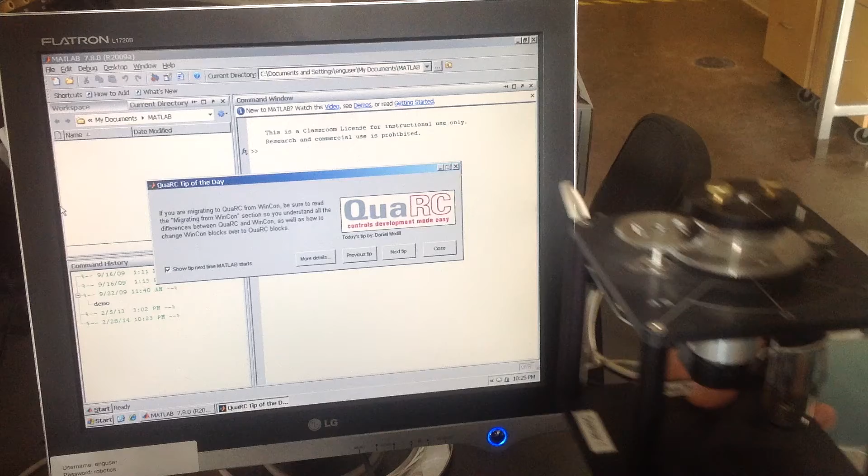Okay, hi everybody. Let me explain the setup for our course module here, course project.

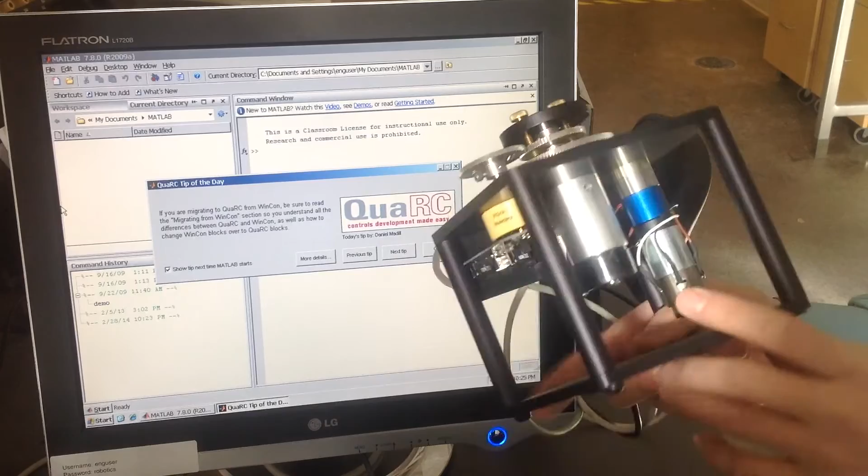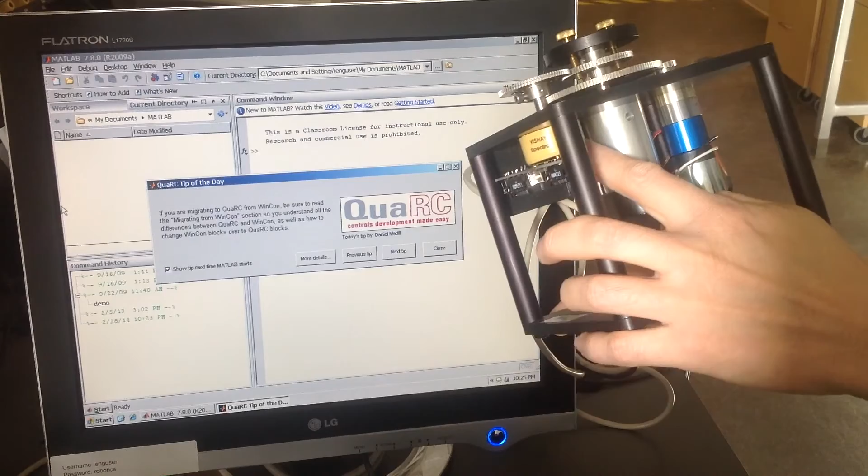This is the Quanser SRV02. This is the base module. It has a DC motor, and there's a tachometer attached to this DC motor. There's a digital encoder here, and an analog potentiometer here. We also have some gearing here for transmitting the load.

This is basically for hooking up external add-on modules. You can have a flexible link, flexible joint, double pendulum or single pendulum, inverted pendulum. But we're going to basically focus on the base module right here.

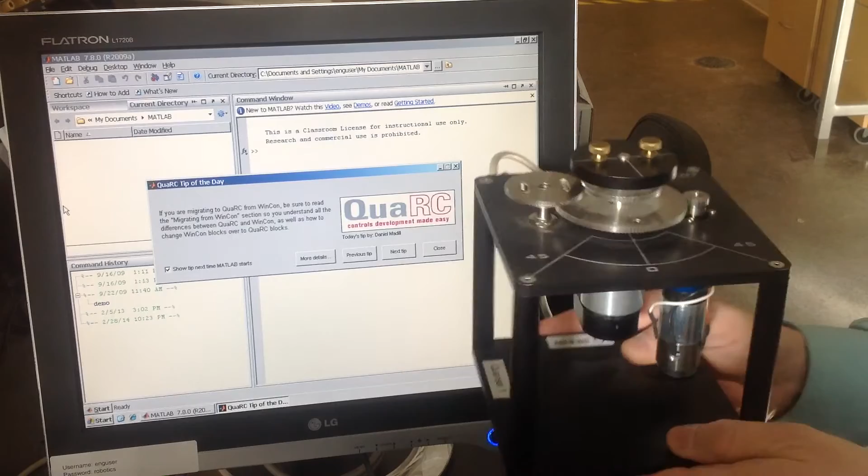There's some wirings from the sensor and also from the amplifier over there, to this module right here.

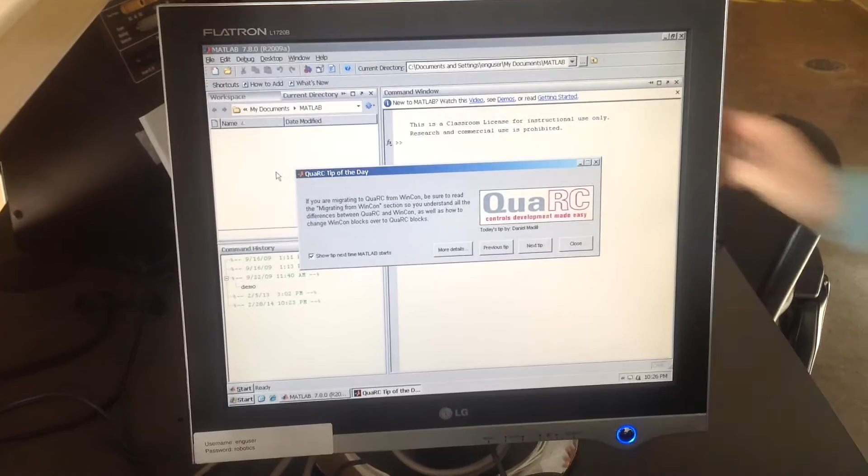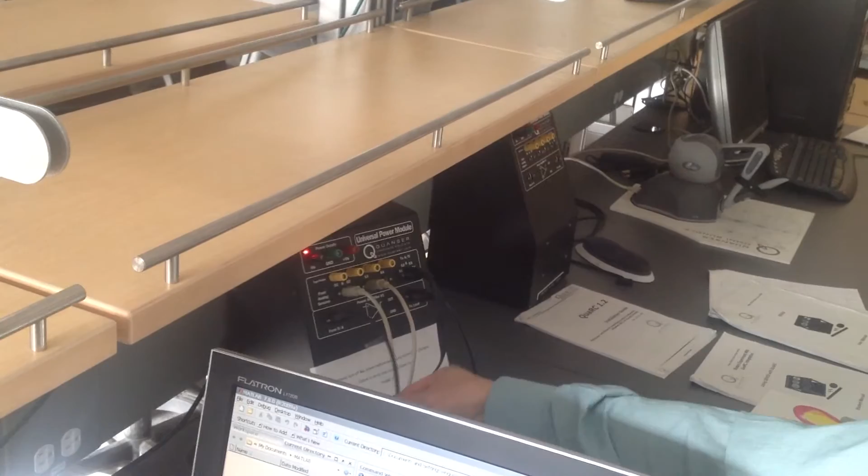The black module over here, that's the power amplifier. For example, the analog signal from the D and A are given to the power amplifier and then fed to this base module here to drive the motor.

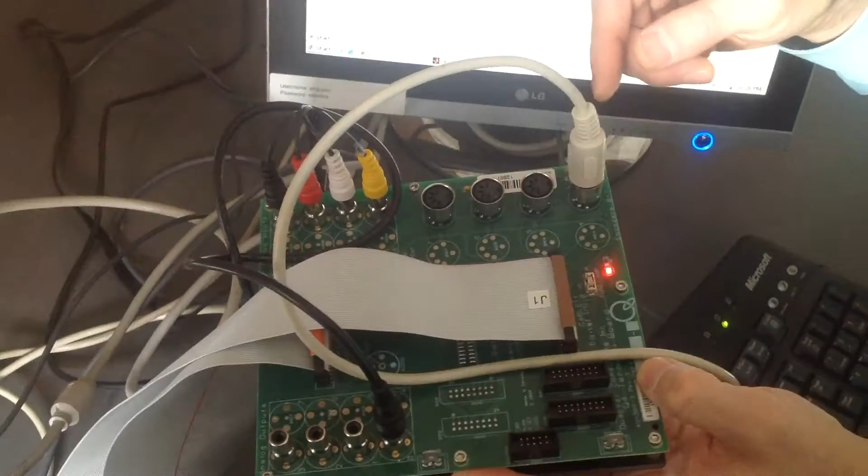Now this module right here is an interfacing board. It interfaces between the hardware here with the QuaRC board inside the computer. The QuaRC board inside the computer will do the compiling and do the execution of the code. Yeah, so that's roughly the system setup here.

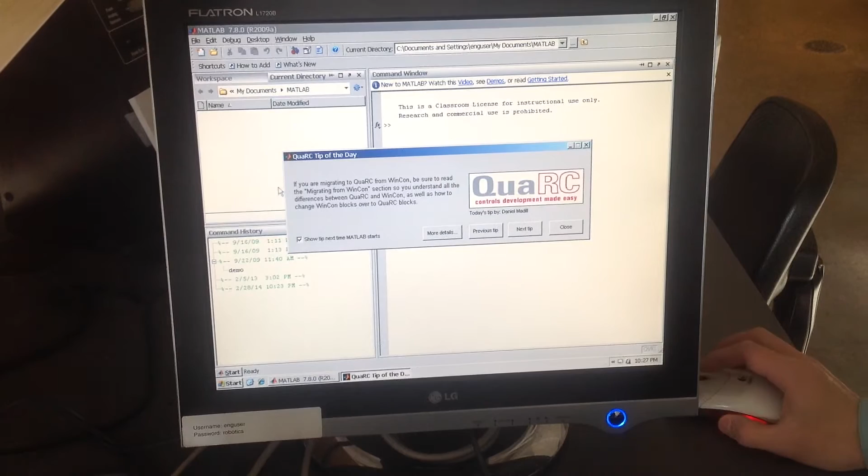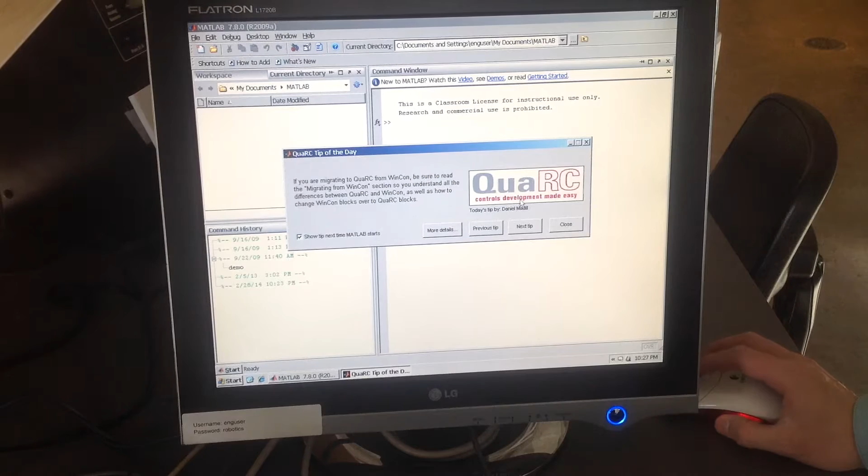Now, when you run up MATLAB, you will see that this QuaRC, which is the library or software for the real-time control system, will start up automatically. It will also add up to the Simulink library, which you can make use of. So once you start it up, you can run Simulink.

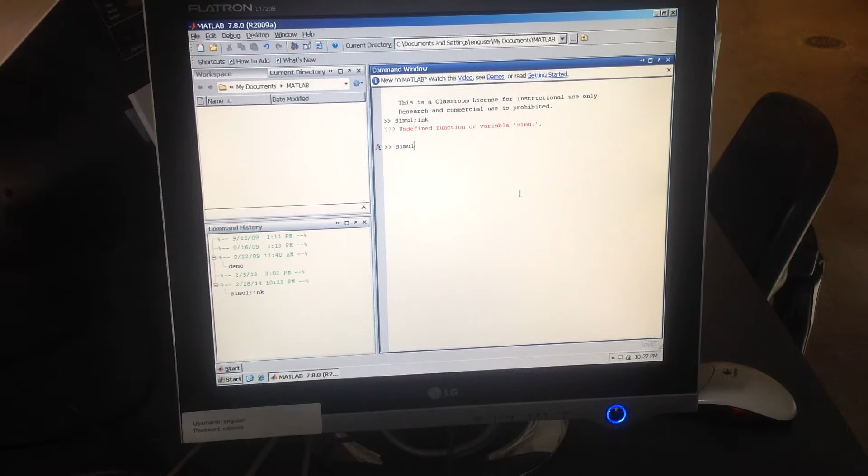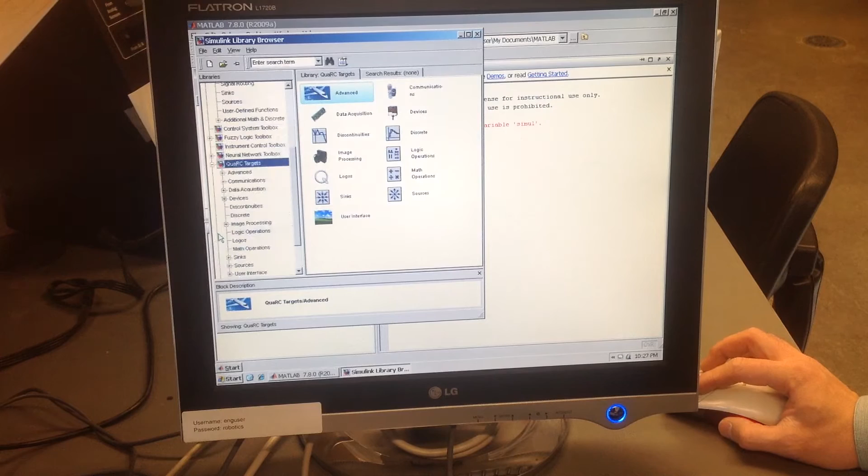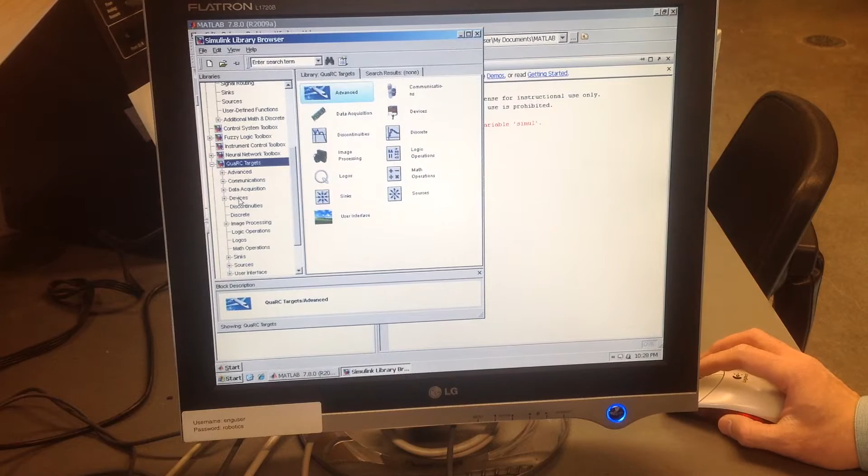As you can see, under Simulink there is a QuaRC target. All the relevant libraries related to the hardware we're talking about are underneath this QuaRC target here, right? So you can just drag some of the blocks and make use of them in case.

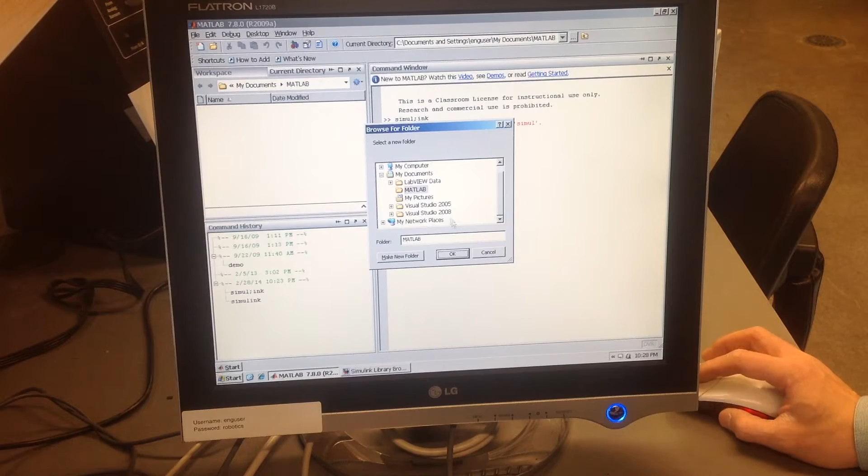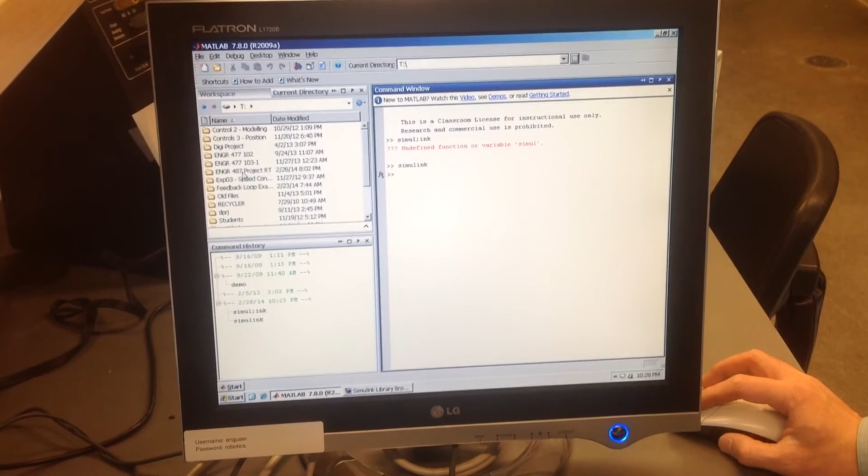Now, when you start, make sure you go to your working directory, to the T drive, the thaw space here. Under the T drive, we have a folder called ENGR487, and this is the folder I want you to work under. You can create a folder under here for your group.

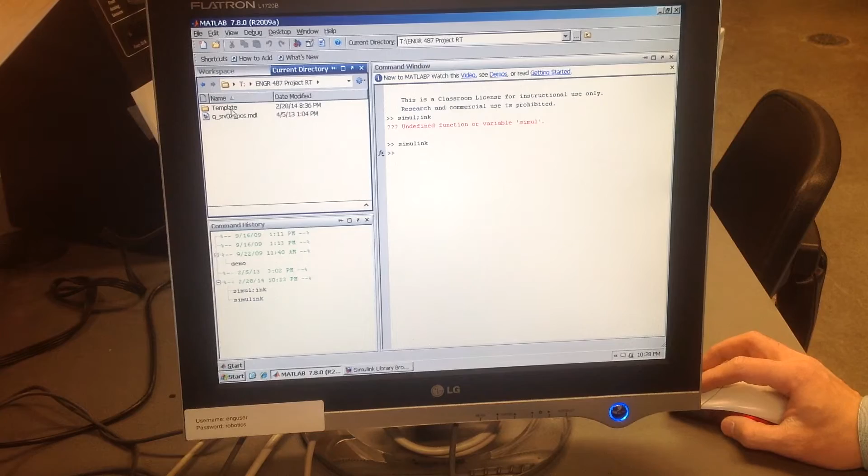And there's the template. So this is the template. Basically, you can make use of the template to build up your controller. So I'll basically show you what the template is.

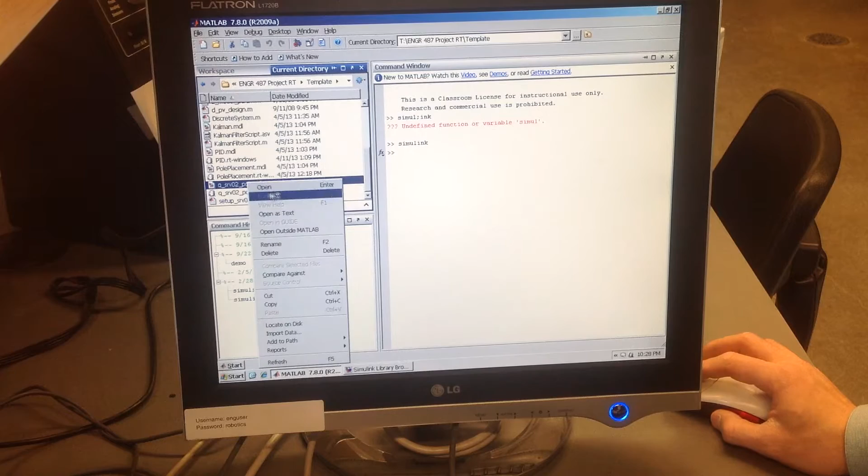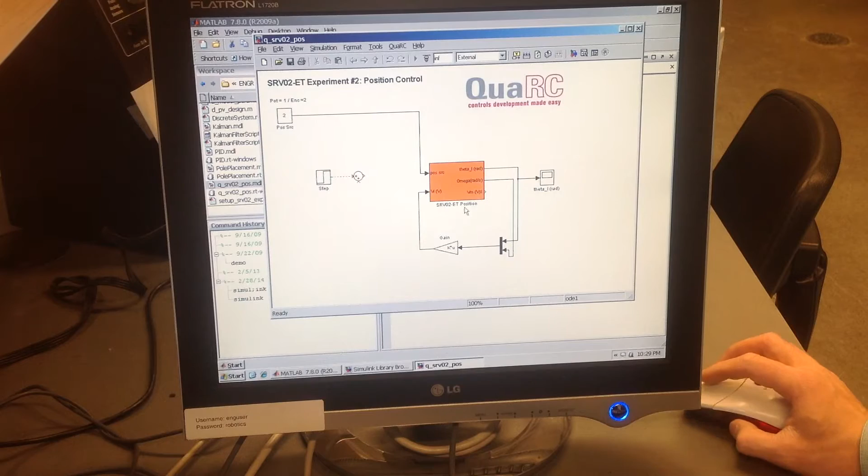So here's the MDL, the Simulink file. Okay, right now it has something here, so I'll keep it here. In the future, in the template, all you have here is just this orange block, okay? This orange block represents the model of the system, which is this guy.

That model, you can mathematically model in one of the short descriptions uploaded to Blackboard. I have a second order model given already. The model is second order between the position and input.

So this guy here represents basically the hardware, right? As you can see, it's a masked block. There's a position, there's a VI, basically that's the voltage input to the module, and the block outputs position, velocity, and the actual voltage given to the system. So for this here, the position basically enables a selection.

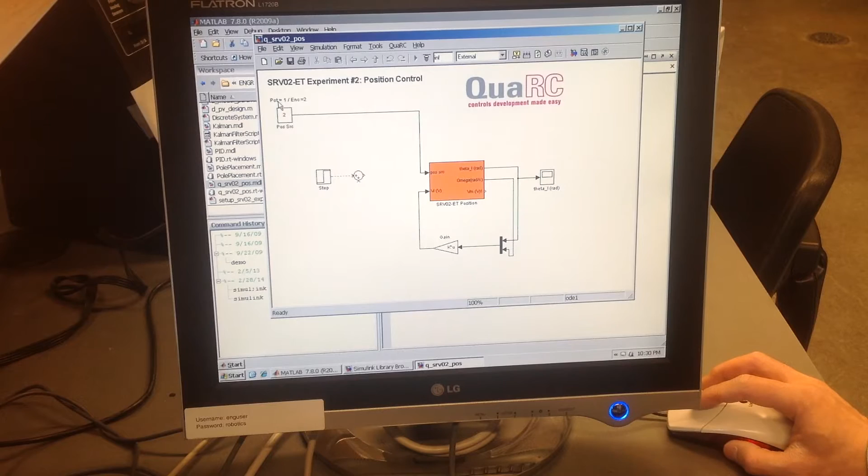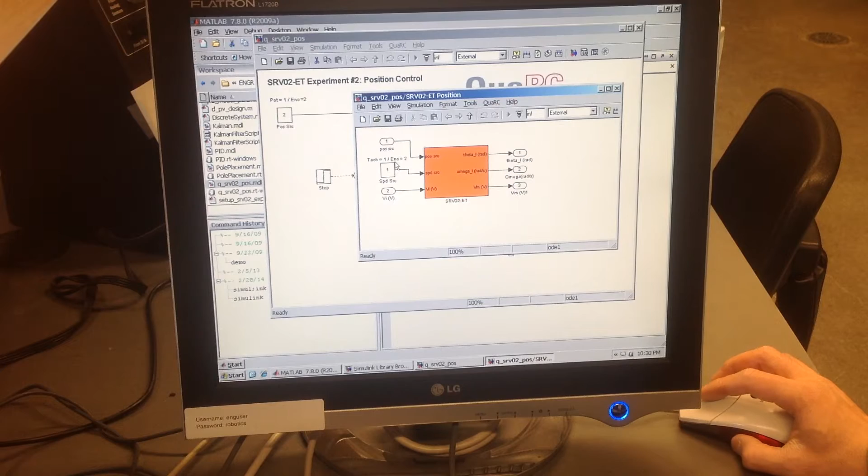The numbers here tell you what position signal you are going to use - are you going to use the potentiometer as a sensor, or the encoder as a sensor? If you open it up here, there's another one here for the speed source. The speed can be from the tachometer, or it can also be through the derivative of the encoder. So that's basically what the number 1 or 2 will represent here.

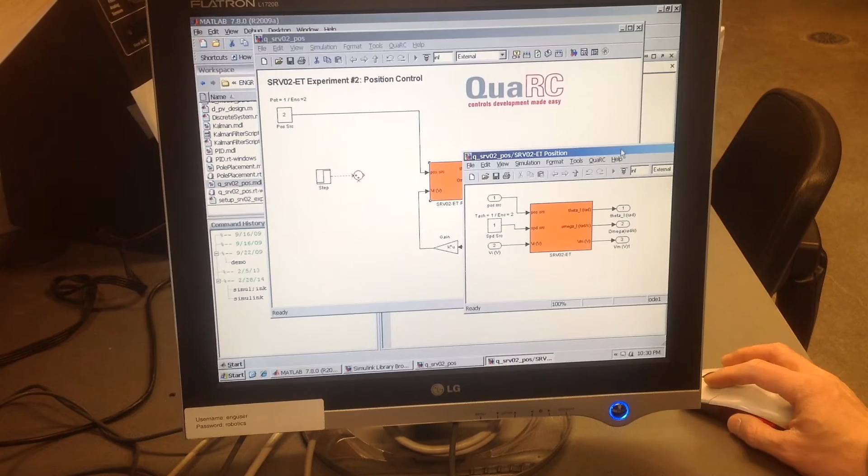The VI here is basically the control signal into the plant, and that control signal is going to be generated from your controller. So underneath this block, that's basically how the signals are being taken in and how the signal is going to be sent out. For example, if you look at this one here, can we zoom in?

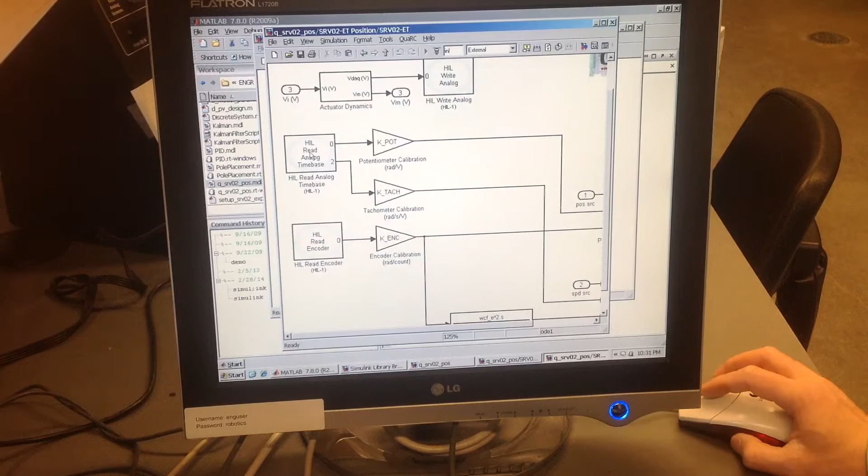So this one here is an HIL read analog time base. This is basically the block I was talking about under Simulink. So if you go to QuaRC data acquisition, generic, time-based - those are blocks coming out of here.

Okay, so what this block does is it reads in the analog signal. There are two analog signals: one is the position, one is the tachometer. Channel 0 gives you potentiometer, channel 2 gives you the tachometer. If you double click here, the board name has to be HIL-1, and this is the channel selection here.

Similarly, there's a HIL read encoder. There's only one encoder, so that's just channel 0. Those are basically some calibration gains that are here to calibrate the reading, to give you the correct value.

And by the way, these parameters need to be initialized. So before you run everything, you need to run this M file here. It's called setup file to initialize all the parameters.

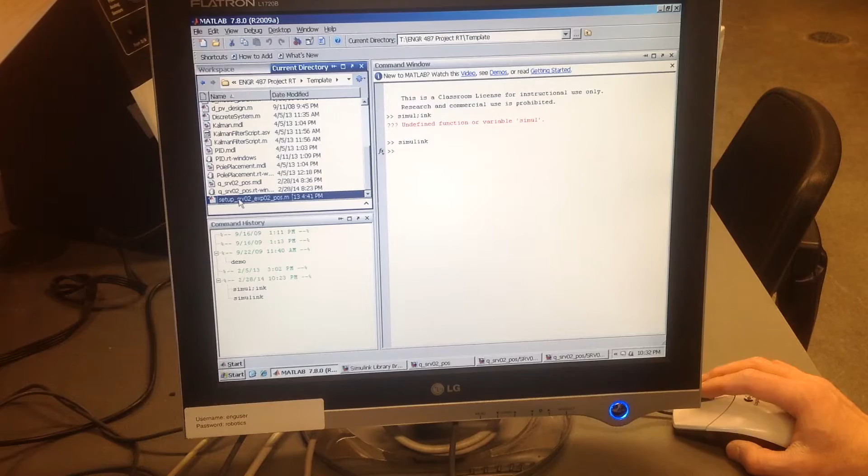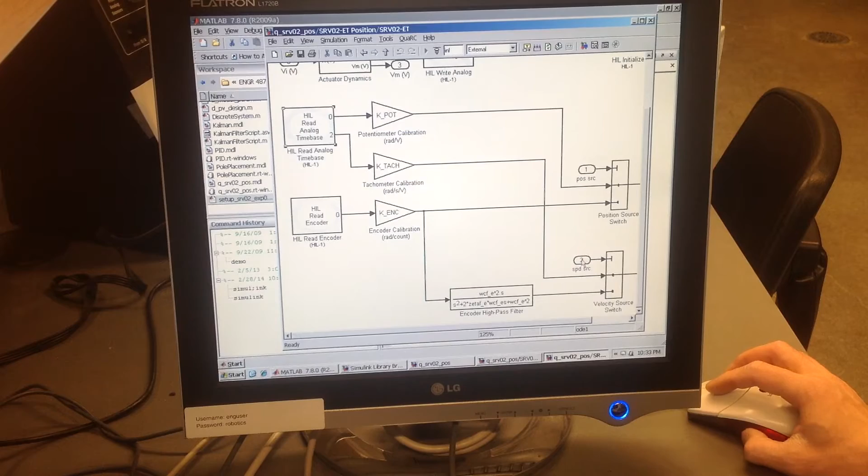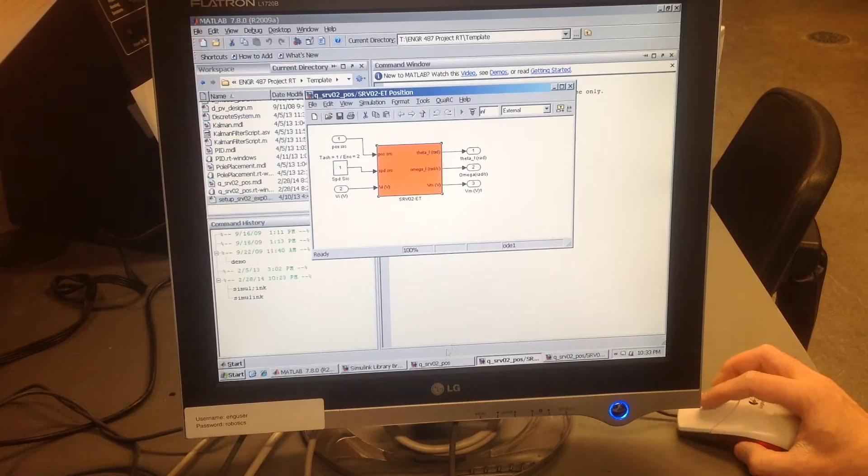So as you can see, the speed source number given here. Where's the terminal 2 from? Right, the terminal 2 coming from here, speed source. Okay, that's the terminal 2. Okay, so that's basically what the system looks like, right?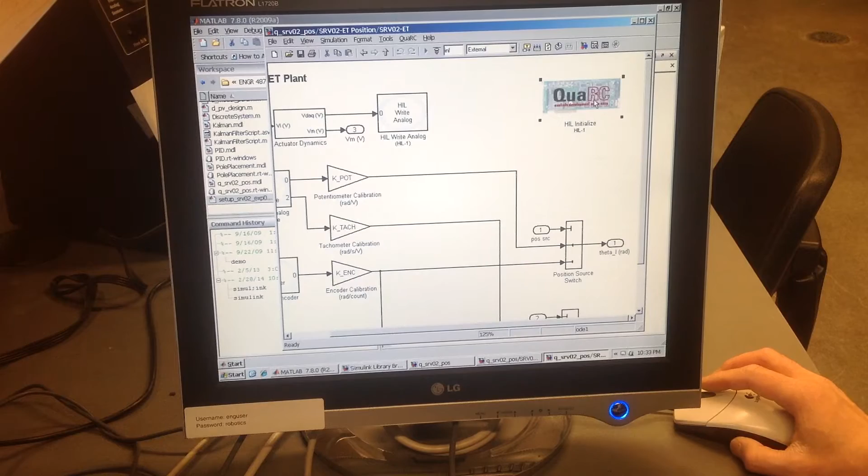Inside every one of these QuaRC systems here, you need to have this module right here called QuaRC. That's the initialization module. If you're building your own reading and outputting system, you need this guy here. And that QuaRC is within this configuration. It's this guy, right?

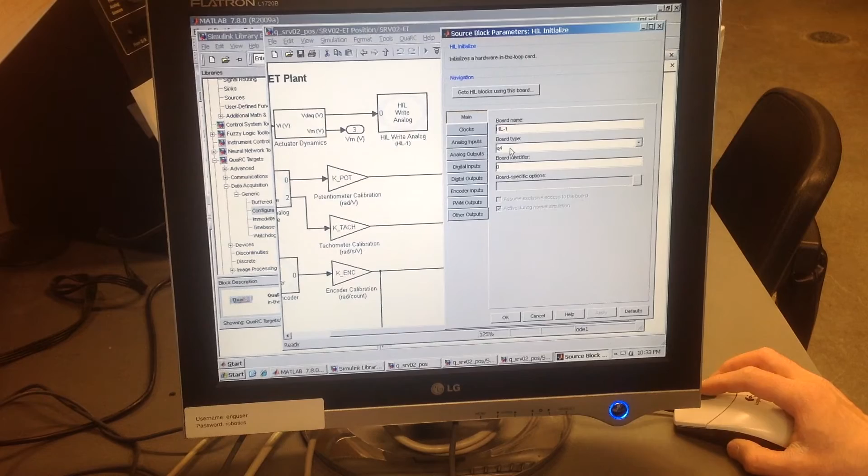So if you double click this thing here, the board name is HIL-1. The board type is Q4. So this is our board type. There's also a Q8, but don't select others. It's Q4. That's two important setup here.

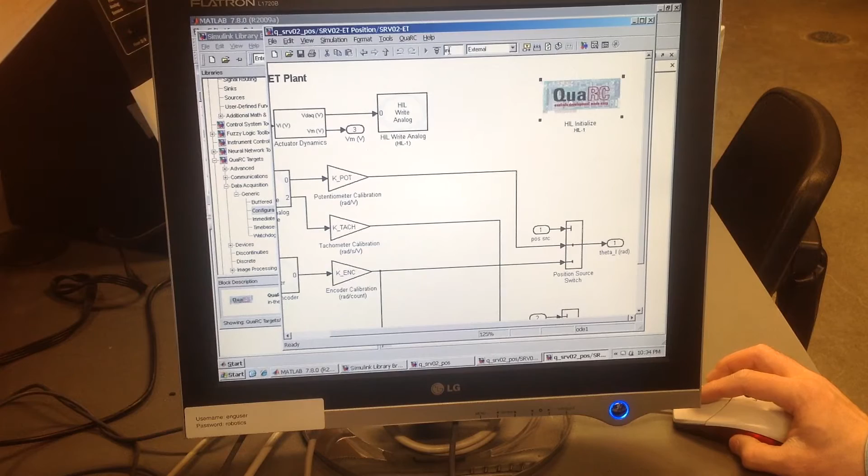When you run the simulation here, it needs to be set at infinite, and the simulation mode needs to be set at external. Okay, so that's also important, right?

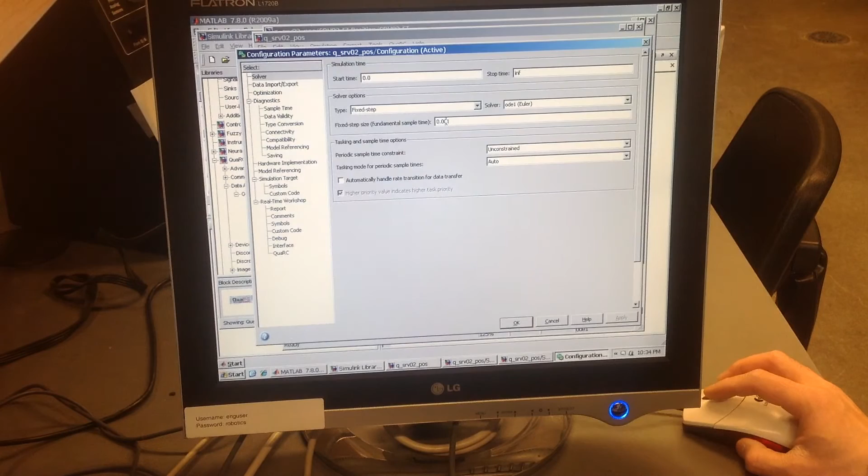And the last thing is sampling time. You go to simulation, go to configuration parameters. Here it has to be fixed step, because it's digital, and this is the sampling time. Right now it's 0.001. If you're designing a digital controller, which probably you design based on sampling time 0.01, then that has to be changed to 0.01 accordingly. So this is the location to change sampling time.

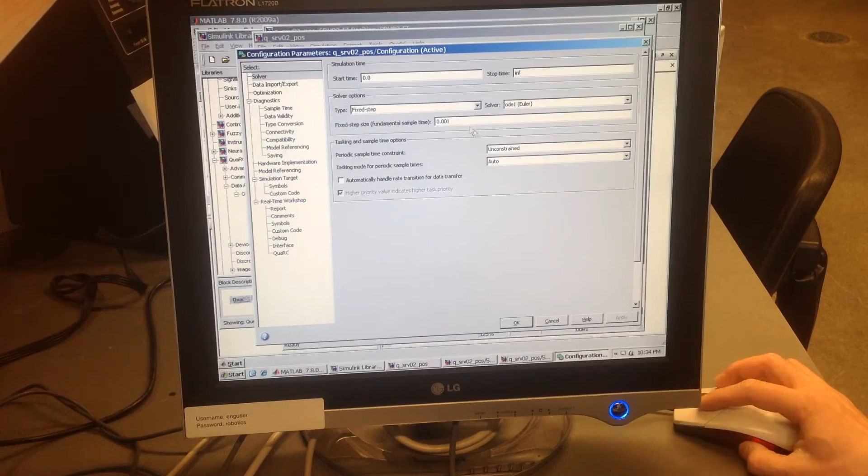So now what I did is I just built up a simple feedback module here. In the class we learned pole placement, meaning U equals negative kx vector. X represents the states. So in this particular second order system, if you recall from the assignment, we can pick our states: one is the position, one is the velocity. So here's my states here.

So I give it to a mux and give it to the gain. Now in terms of pole placement, generally you need to have a desired pole location first, and then calculate the feedback gain k, right? But in this case, I'll just arbitrarily plug in a gain matrix k. For example, I'll put a -1 here and 0, right? So where exactly did I place the pole? I don't know, so we'll just check it out here.

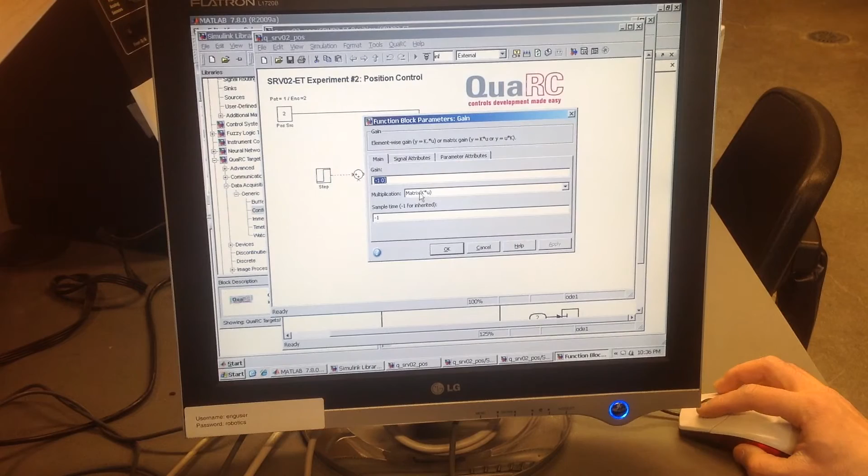Click OK. So the other thing is here, make sure this is a matrix multiplication here. Make sure this is a matrix k by u, not element-wise k times u. So that's about it. When you build, you're going to have this block here. So that's a simple pole placement feedback system.

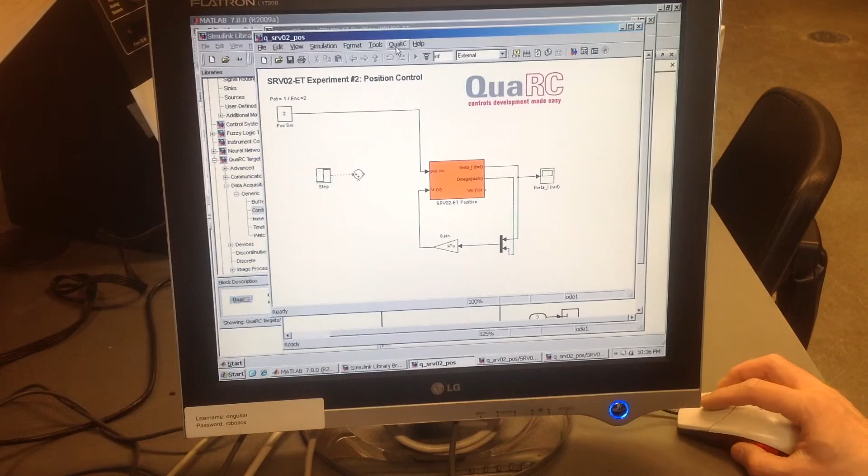Okay, to run it, we need to remember to run this setup here. Run the file initialize. Then coming back here, I'm gonna delete this portion here. QuaRC, then build. Okay, so build it.

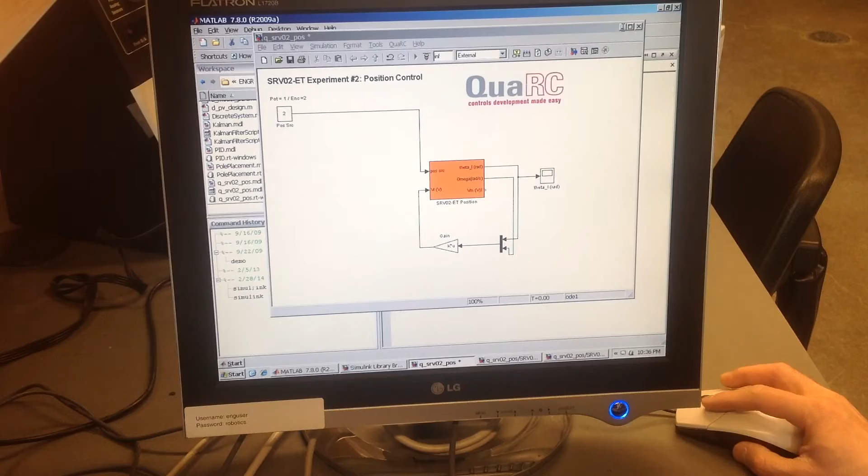So when you build it, if you go back to your MATLAB window, you will see something's going on to do the compiling and building part. So there we go. Basically, the compiler will compile or convert the Simulink model into an executable file, and at the same time it will download that onto the target board.

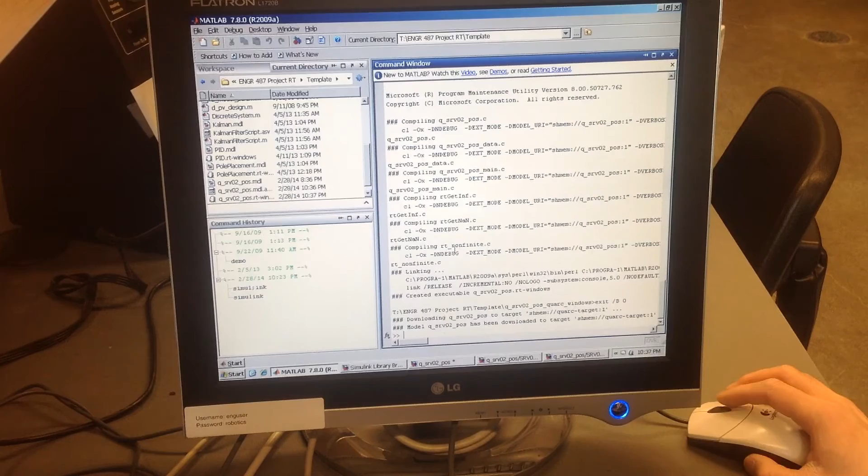And then the target board will run the executable code and drive the motor, drive the setup. So that's finished. So now I'm able to run it now. So QuaRC starts here.

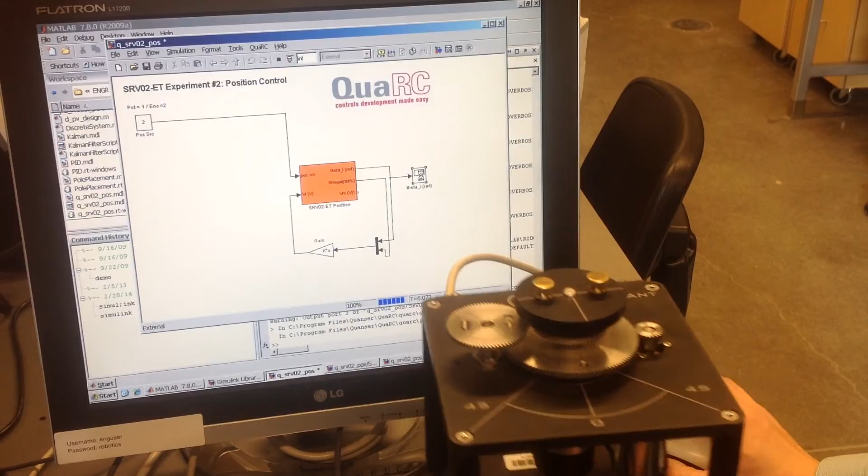So it's running. So now here's the system here, because this is a regulator, right? It's not a reference control. And right now you don't see anything in here. But if I twist that, it's supposed to come back here, right? Yeah, so if I twist it, it'll come back.

Probably pull this, run again here. There we go. So, right? Yeah, so you have this basically disturbance here. But right now it's pretty soft because the gain that we give is only 1, right? It's pretty small.

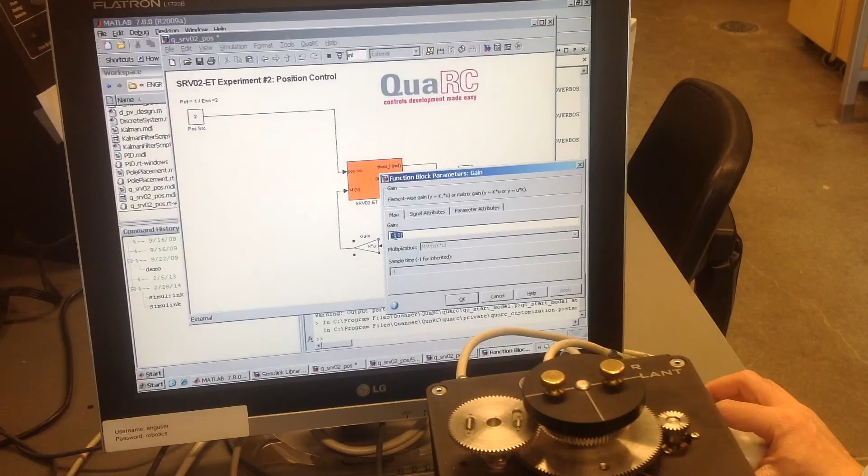If I give a higher gain here, let's say if I give a 5 here, that'll increase the response here. Okay, so let's see. There we go. So if I increase that, there we go, right? So now you see a disturbance being regulated back to 0.

There is still a slight steady state error because right now there's no integrator included. If you keep increasing the k gain, the steady state error will be decreased. Okay, so that's a simple demonstration of building up a controller.

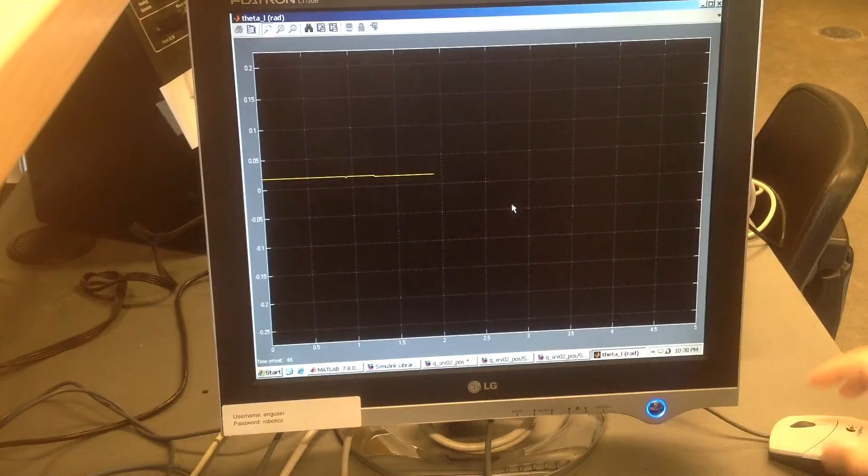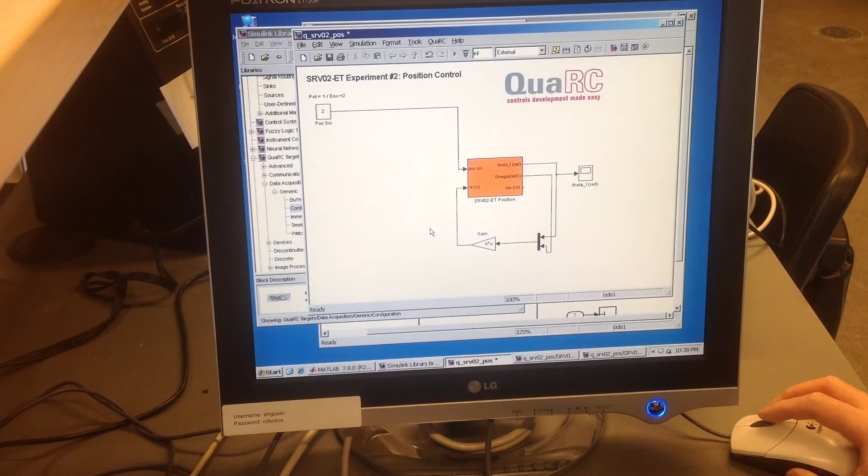You can easily build up a controller, basically outside based on this model right here. You can base a digital controller on this. In the future, you can build an optimum controller, Kalman filter plus optimum controller, LQG. Those are basically what you're going to do as the lecture goes on. Okay, so I think that should be it.

Where do you drag and drop the components from? If you want to use, if you're building a reference control, you can go to this Simulink library here, go to the commonly used blocks, and let's say go to the source here. I'm gonna probably use a step input. So then you can drag the common block here. There we go. So step input here, right?

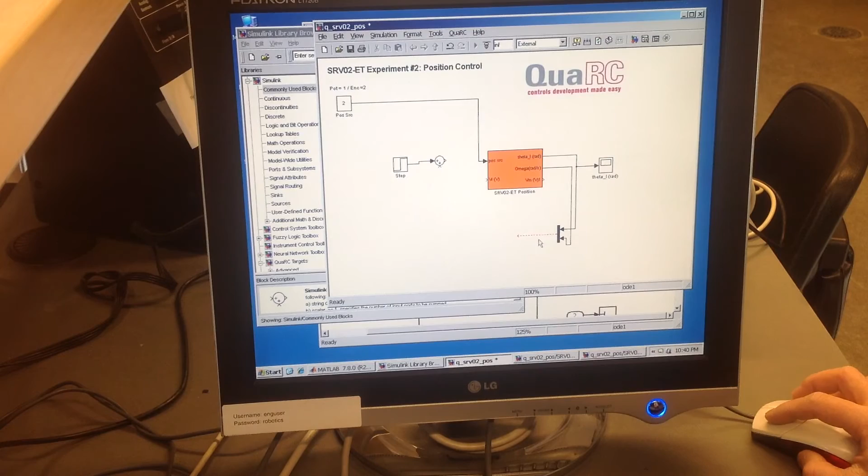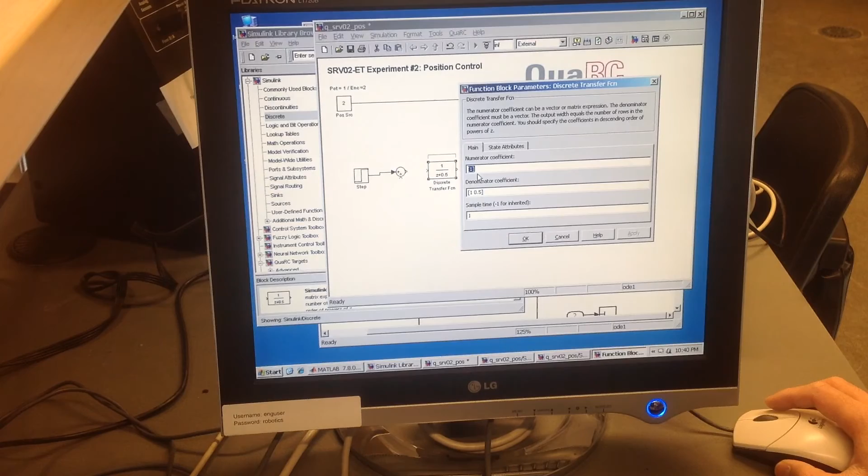If you're building a digital PID controller, then go to discrete here. Go to difference, either one of them will do, I think. Go to this discrete transfer function here. So in the lecture notes we have an example of getting a digital controller based on the continuous PID controller, basically using Tustin or using backward difference numerical approximation, right? So you will basically end up with a discrete transfer function or pulse transfer function.

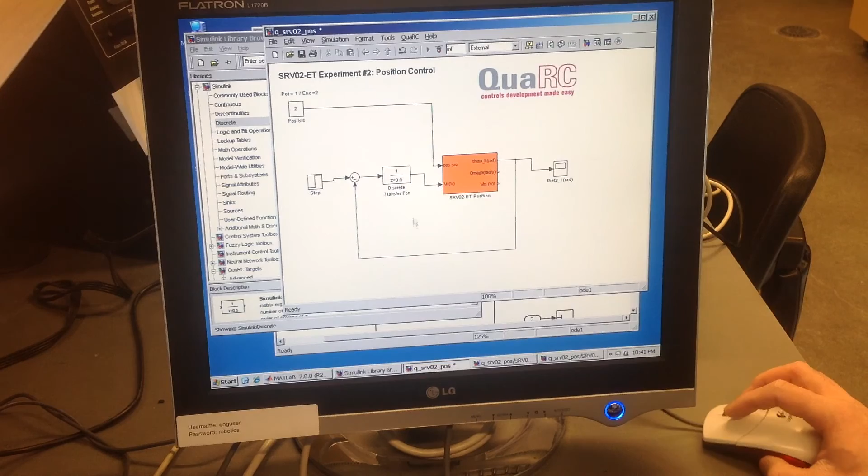So that basically you can just simply connect this here and this here at the same time, and with the negative feedback, to the position here, and that has to be negative here. So that's essentially a simple loop, the digital PID control loop like this, right? This has to be all updated, of course. Yeah, so the sampling time here also needs to be updated based on what you're using, right? And that's going to be a simple PID, okay?

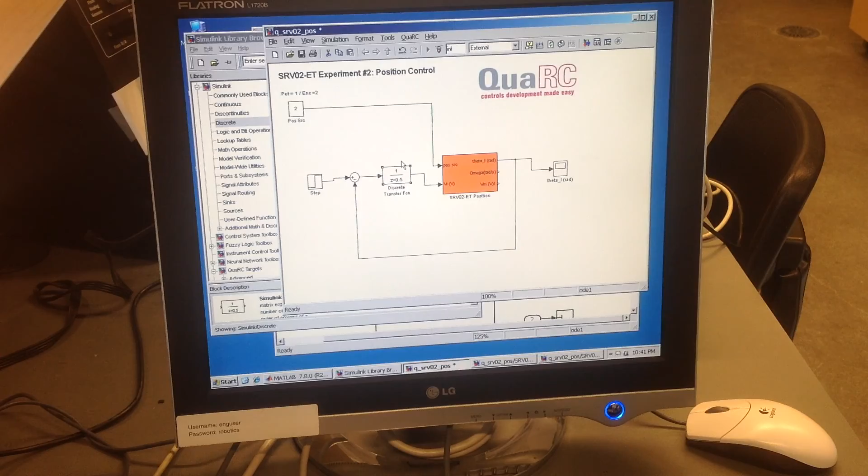Okay, so this kind of demonstrates the easiness of implementing a controller using the QuaRC. If you're interested, you can also use some add-ons for more advanced controls. Okay, yeah, thank you.